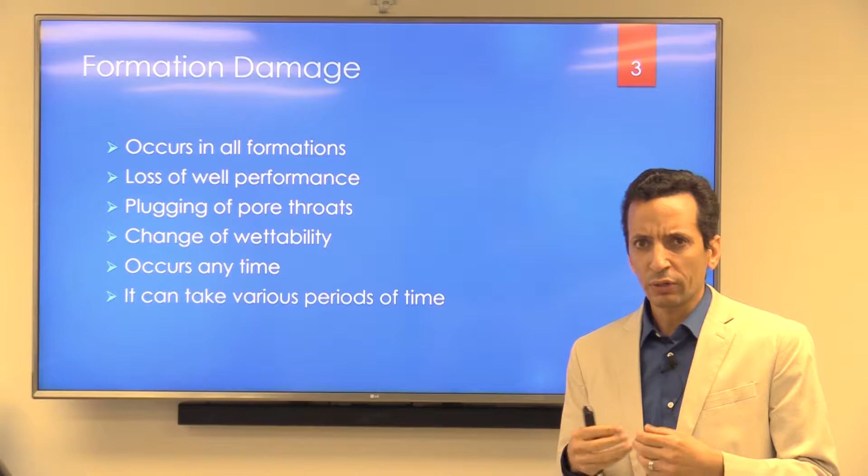Okay, let's begin. Imagine the situation. We have sick wells and we have healthy wells, very similar to human. If you feel something wrong with your body and you decide to go and see a doctor, will the doctor give you a medicine without asking you any question?

For sure, no. What will happen is the doctor will try to collect all information about what you're feeling, what is wrong with your body, he will check your body, and then decide what kind of disease you may have. And finally, he will write you the treatment, he will write you the medicine.

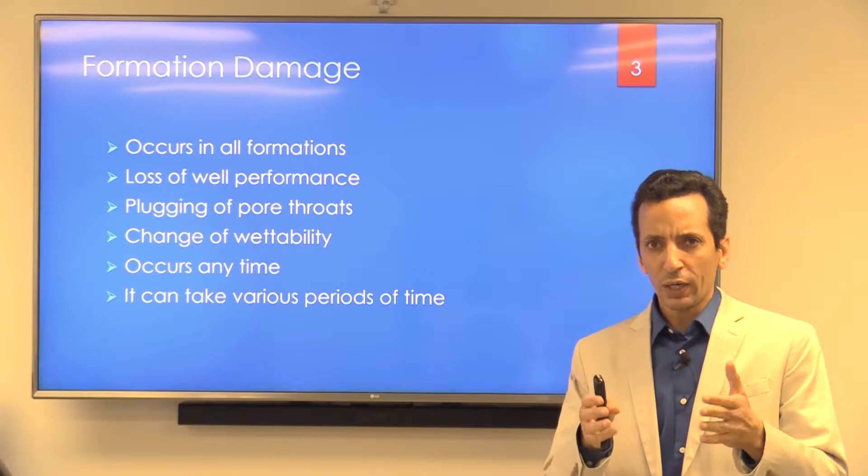Wells are very similar. If your job is a petroleum engineer or reservoir engineer, your job is similar to a doctor, and your well is your patient. The disease that your well has is the formation damage. So formation damage is very similar to a disease that makes you sick.

Formation damage may occur in all formations, may occur anytime, and we can easily identify there is a formation damage whenever we start seeing a loss of well performance, an unexpected loss of performance. This formation damage may change wettability, and for sure it will plug your pore throat.

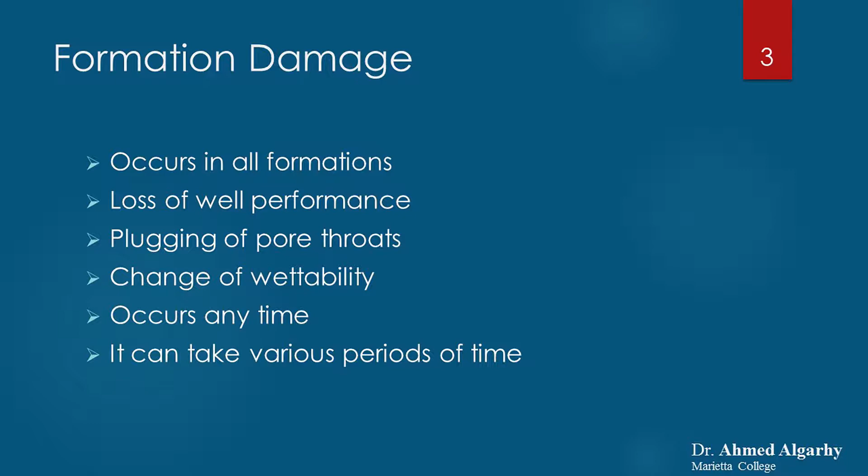It may occur anytime, as I mentioned before, it can take various periods of time. Also, similar to a disease of a human, it may be a single disease or maybe a combination of different diseases. So we need to figure out exactly what types of formation damage we have.

My advice to you, if you don't know the type of formation damage, please don't do anything. Take your time to study the case. And the last thing to do, whenever you feel that you understand the situation, you write your treatment. You decide if you will do an acidizing job or a fracking job or any chemical treatment you want.

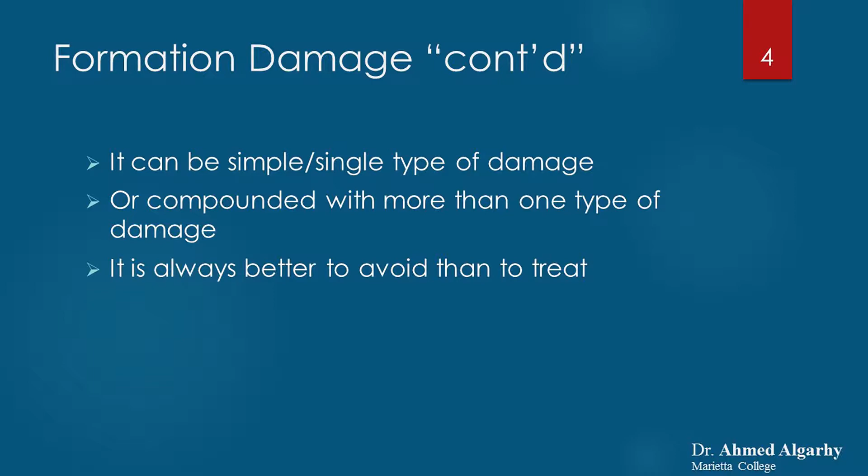Also, it is better to avoid formation damage, way better than letting your well get sick and then you start thinking of what should be the right treatment. And remember, the treatment of acidizing or fracking is hundreds of thousands of dollars, sometimes millions of dollars.

Okay, how to identify a formation damage? Simply, when I see that there is a loss in production, there is a loss in performance, also I can get a sample to the surface and do analysis for that sample and see there is a formation damage. Also, I can send a downhole camera, a video camera, and check if there is damage. This is not common, but it's still something doable. And finally, we can do a PLT, or production logging, to confirm that we have a formation damage.

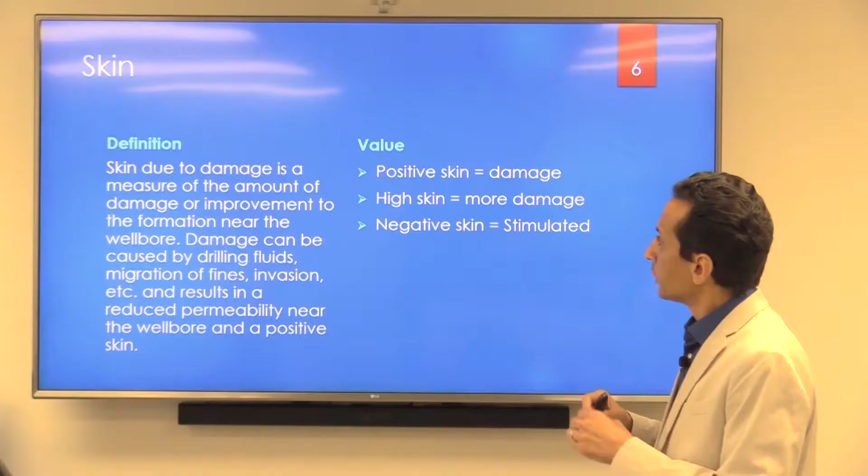Formation damage is something hard to quantify. So we invented the term skin to quantify formation damage. Whenever you see a positive skin, this means we have a formation damage.

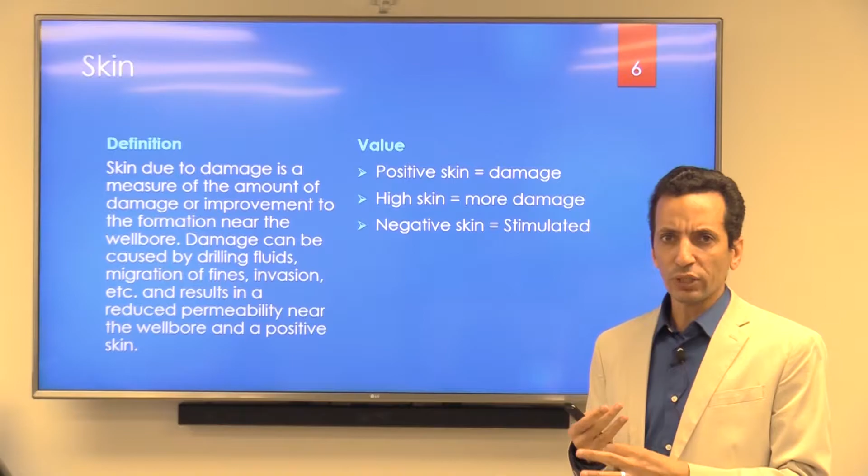If it is a high positive value, this means there is severe damage. If we see a negative value for skin, this means the well we have is stimulated. Stimulated means we did a frac job, acid fracking, acidizing, or any kind of treatment that may enhance the production.

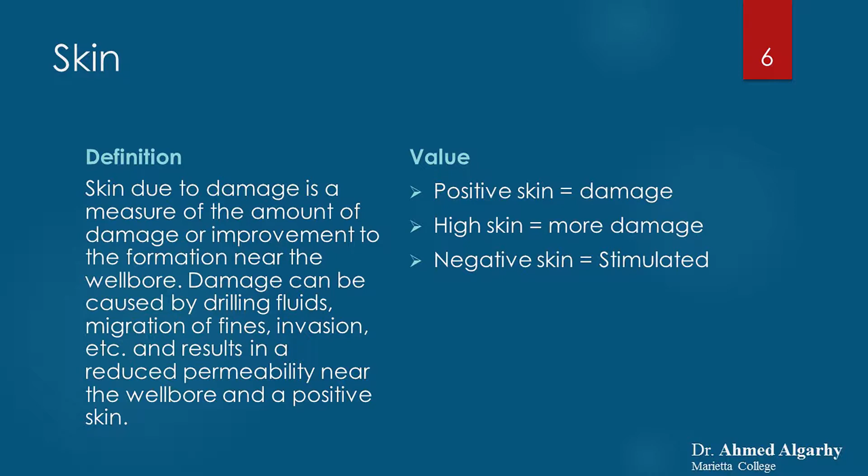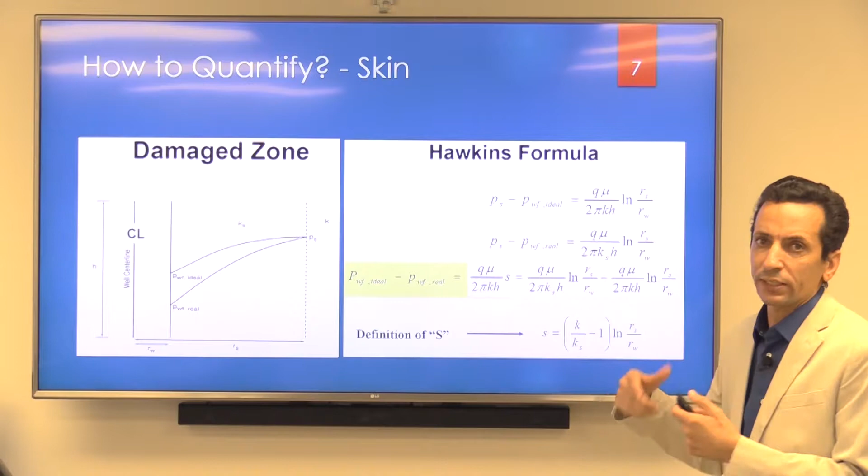So one of the models used to quantify skin is the Hawkins formula. As you see, S is the skin, which is K over Ks. K is the permeability, the reservoir permeability, the original permeability, over Ks, which is the damaged permeability, or the permeability inside the damaged zone.

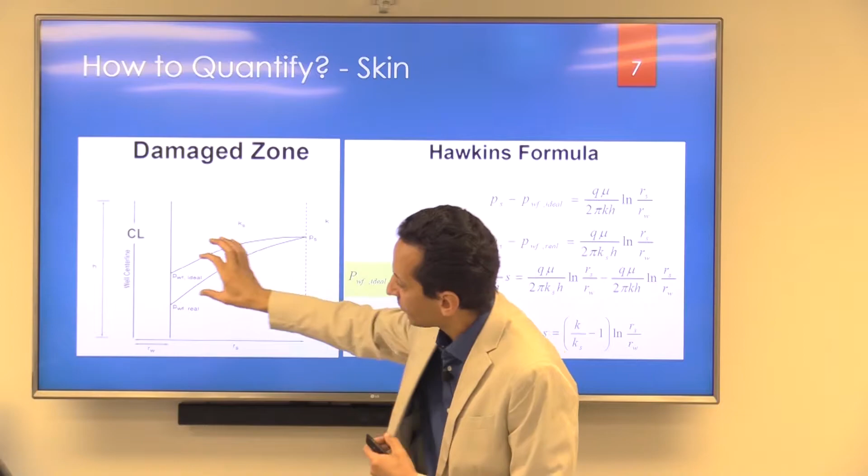As you see, starting from this line to the well bore, this is a damaged zone, from this line to this line. The ideal production should be this curve, but as you notice, because of the damage, we have a pressure drop. That delta P happened because we have a positive skin in this formation.

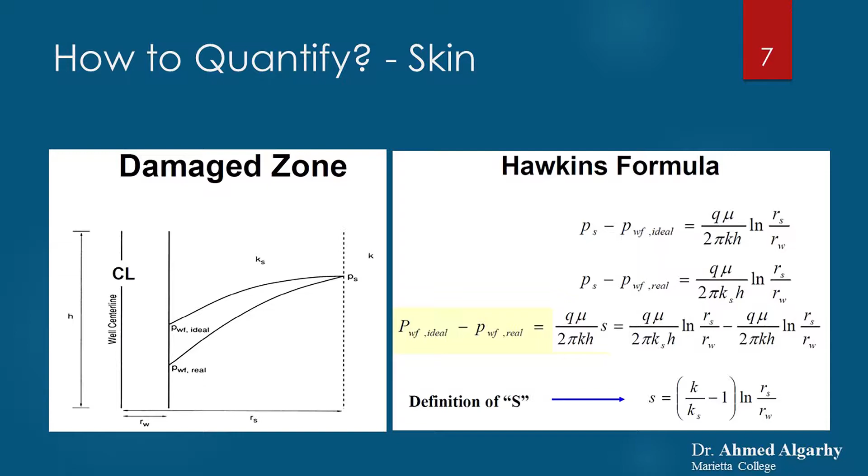There are different types of formation damage. The causes of formation damage may be mechanical or chemical. Mechanical causes may be like solids invasion.

Do you know when this happens? During the first day you drill your reservoir, because of the drilling fluids, the solids suspended in that fluid invade the formation and start damaging your reservoir permeability.

Also, it may be workover damage because of the workover fluid. And maybe it's emulsion, water and oil or oil and water, or maybe there's water blockage, and this is very common in gas wells.

Also, we may have some chemical types of formation damage, like precipitation due to incompatible fluids, and we get a precipitate of sulfate or sulfide.

Also, we may have fines migration. In the next slide, I will tell you exactly what fines migration is. One of the good questions I like to ask my students: what is the difference between sand production and fines migration? In the next slide, I will try to give you a good answer for this question.

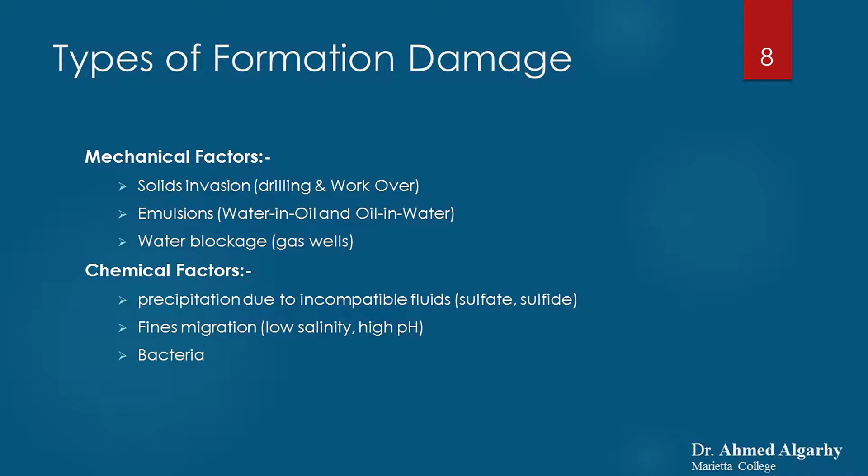And finally, we may have formation damage because of bacteria, very similar to, let's say, SRB or sulfate-reducing bacteria. It is a very common cause for formation damage.

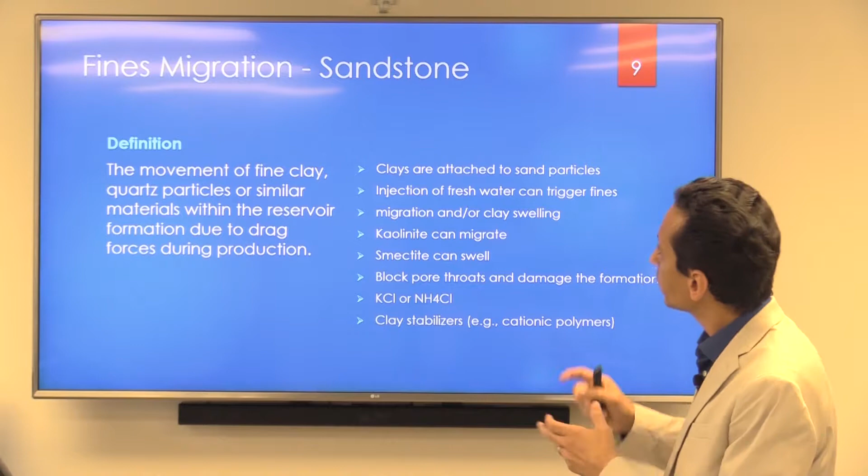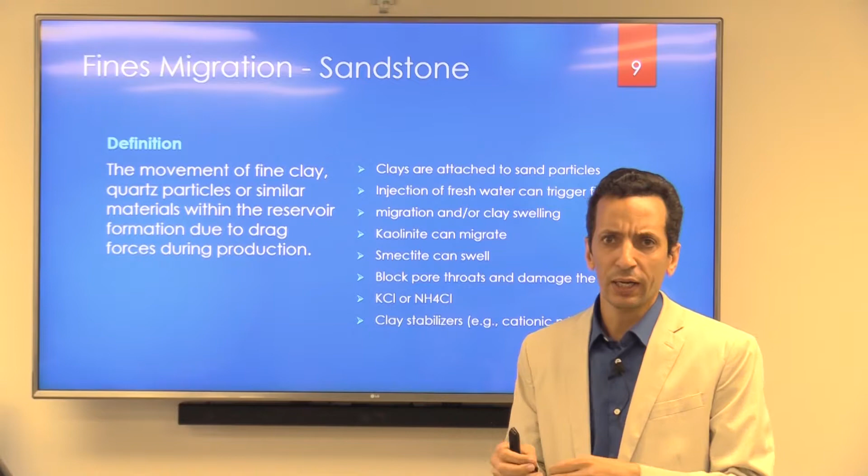What is fines migration? Again, fines migration is when you have solids inside your reservoir, most likely clays, most likely kaolinite, and these solids move from a location inside your reservoir to another location inside your reservoir.

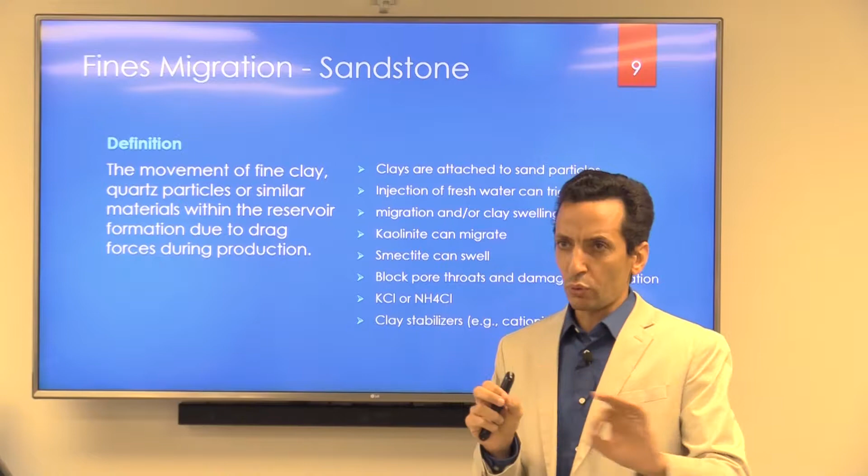But these solids are not produced, don't reach the wellbore and are not produced. So if that solids moves from a location inside your reservoir to a second location, it may get trapped or plug the pore throat and damage the permeability, but the solids are still inside your reservoir. We call that fines migration.

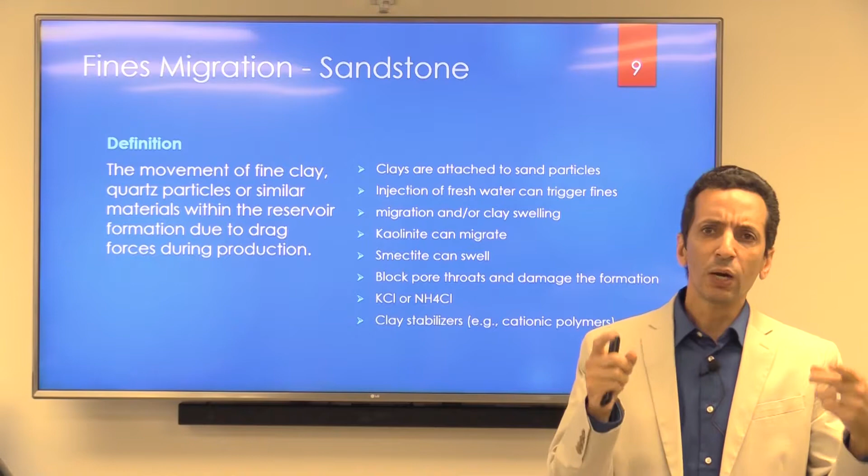A very common clay that does this behavior is kaolinite. And if these solids get produced to the wellbore, now we call it sand production. I wish this is now clear for you, the difference between fines migration and sand production.

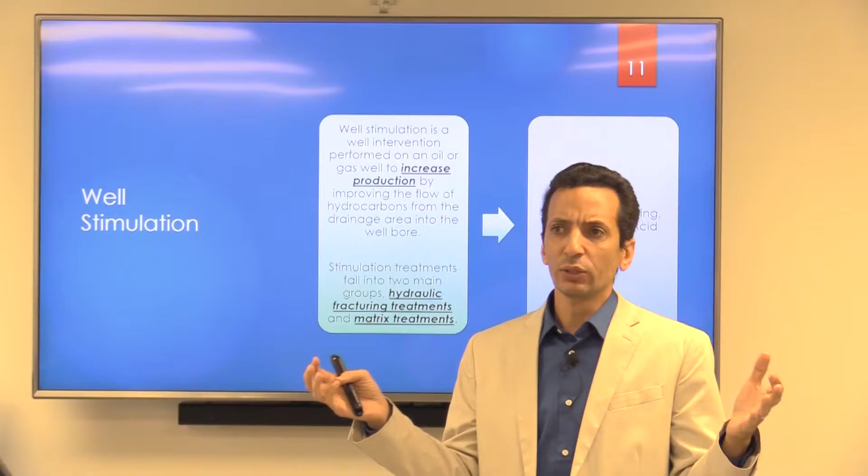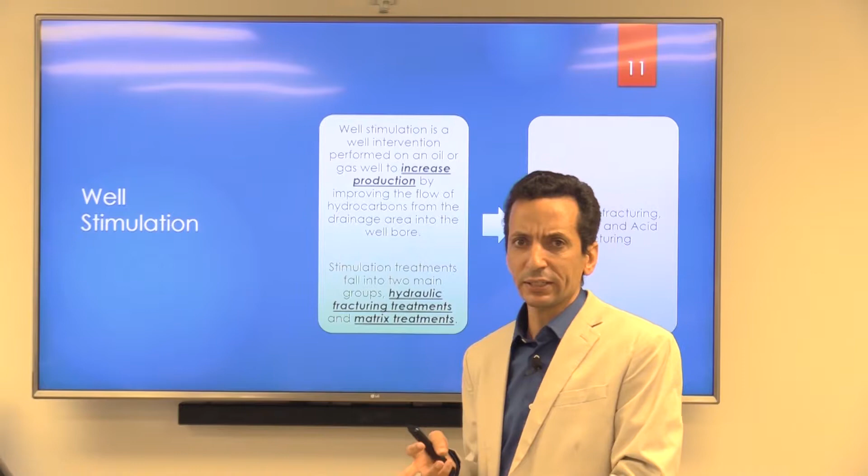Okay, now let's talk about what well stimulation is. By definition, stimulation is anything we do to stimulate the production or make the production better. So we may be talking about hydraulic fracking, acid fracturing, or acidizing. All of these techniques we call well stimulation.

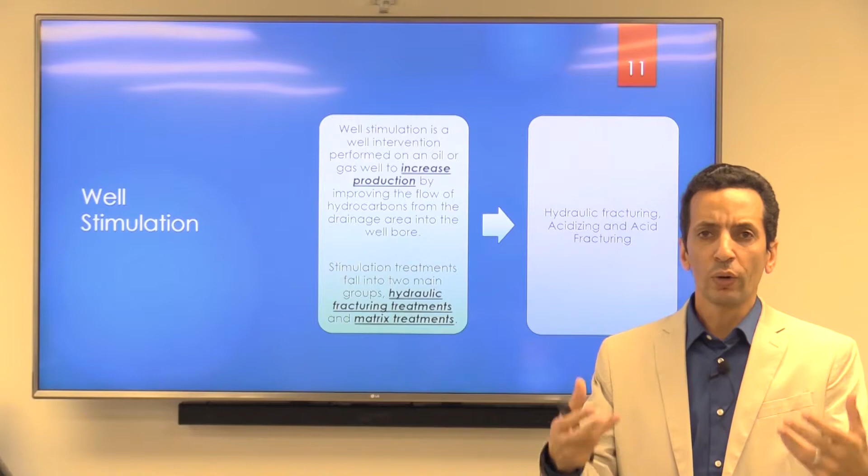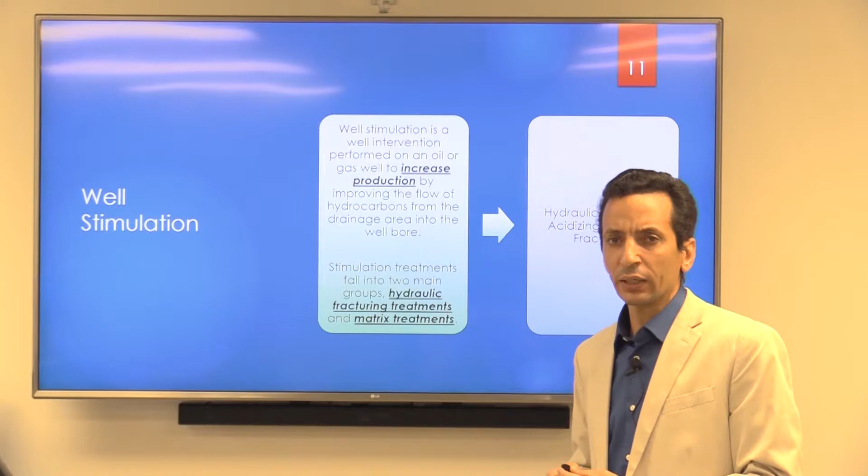Why? Because it stimulates my well production, makes my well production way better than normal. So a well stimulation job is a well intervention job that increases the productivity of my oil or gas wells. Again, it may be hydraulic fracking, acid fracking, or an acidizing job.

What is fracking? Simply, fracking is engineered fluid, or fluid with specifications, that we inject at high pressure and high rate into my reservoir to break it down, to crack my reservoir. When we crack the reservoir, we initiate, let's say, two wings.

Let's say this is the ideal case in a conventional reservoir. We initiate two vertical wings of a fracture, and these fractures keep growing away from the wellbore, and this increases the contact area with my reservoir and increases my productivity.

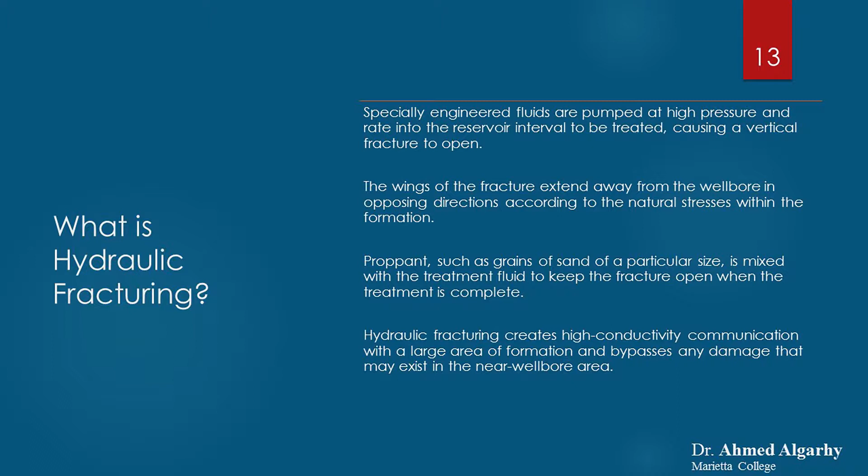But one of the problems I may have is that when you stop pumping, the fracture you created will close. This is why we need to use something to keep this fracture open.

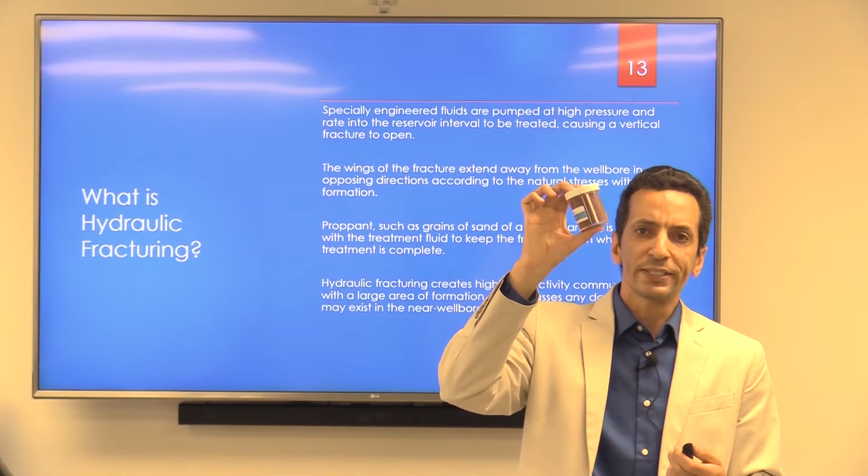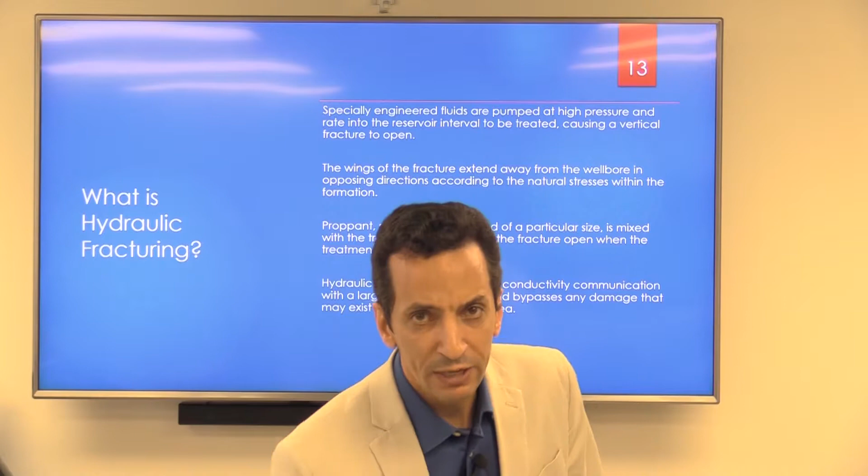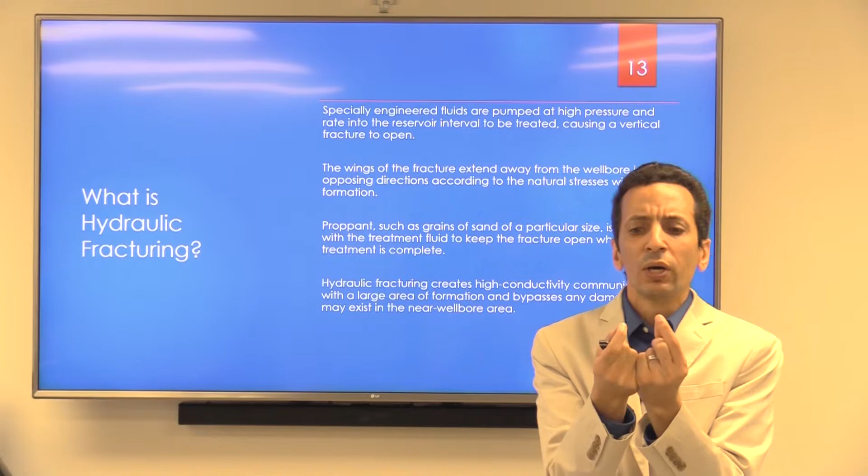And actually, we use something like this: a powder we call sand or proppant. We inject this with the frac fluid and it gets trapped inside the frac I'm creating. Whenever you stop pumping and the fracture tries to close because it's losing pressure, it will close on that proppant, and that proppant has very high permeability, so it will be similar to having a highway for hydrocarbon to reach my wellbore.

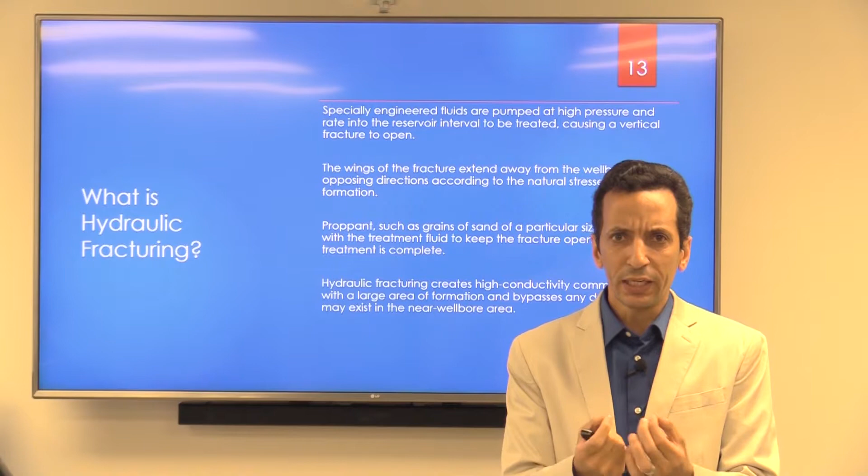So I'm still getting a benefit of increasing the contact area with my reservoir. And now, because of the proppant, I can keep my fracture open, and I can keep the good communication between my wellbore and my reservoir.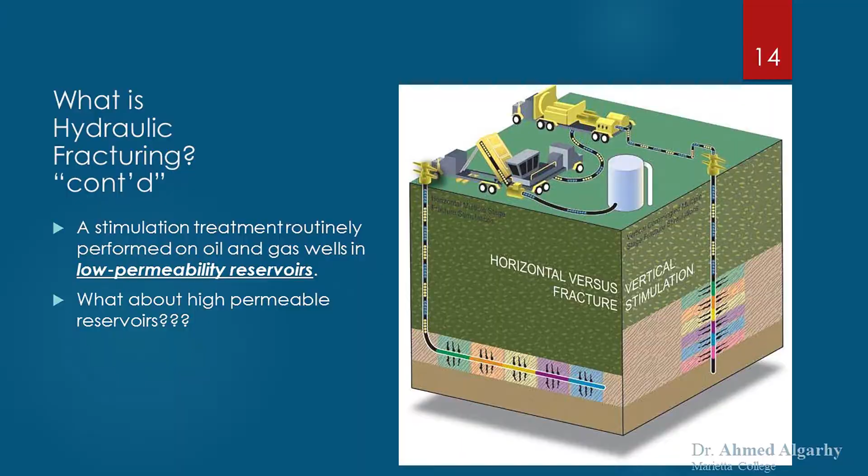Look at this figure. As you see here, this is a vertical well, and this is my reservoir, and I do perforations, and I keep injecting at high pressure and high rate until I exceed the resistance of that formation. I break it down.

When you break it down, you increase the contact area with the reservoir, and you start increasing production more than expected. And to keep the fracture open, we inject proppant with the frac fluid.

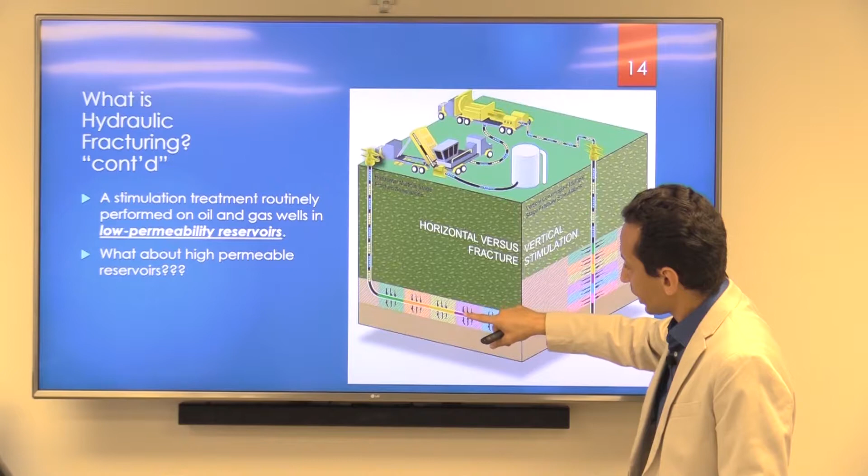Look at this horizontal well. This is the horizontal section, we call it the lateral. I cannot frac all that lateral in one stage, so I do it in stages. I perforate the first stage, then pump to create a fracture, then set a plug. Then I perforate again in the next stage, pump to create a second fracture, and set a plug, and so on. At the end, I drill out these plugs and open my well to production.

So why does a vertical well produce less than a horizontal well? Simply because the horizontal well has more contact area with my reservoir. Why does a fracked well produce better than an unfracked well? Simply because the fracked well has more contact area with my reservoir.

Another reason is that the fracture itself is similar to a highway, a very conductive surface I'm creating. This gives a very good path for the hydrocarbon to take immediately, in no time, from the reservoir. Whenever it reaches the body of the fracture, it gets immediately to the wellbore and gets produced.

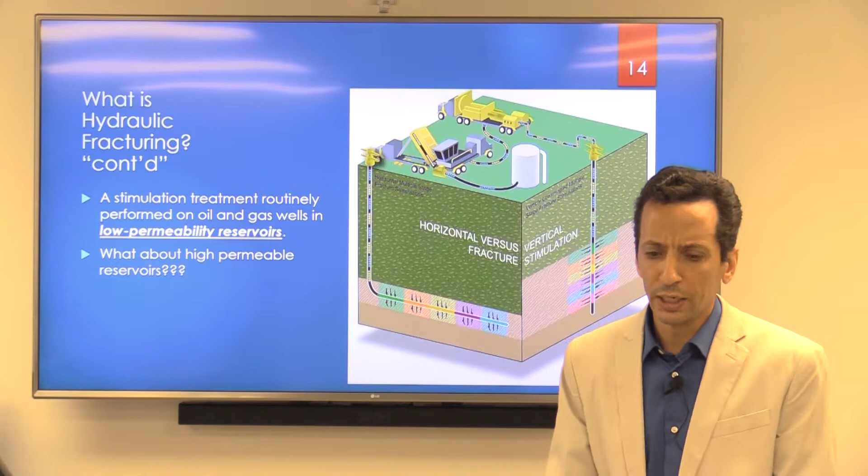To give you an idea of how a frac job looks, I want to show you this video. You have the link here. This is from Chesapeake, a famous company in the United States and one of the major gas producers. You can get this video from YouTube. Let's watch it together.

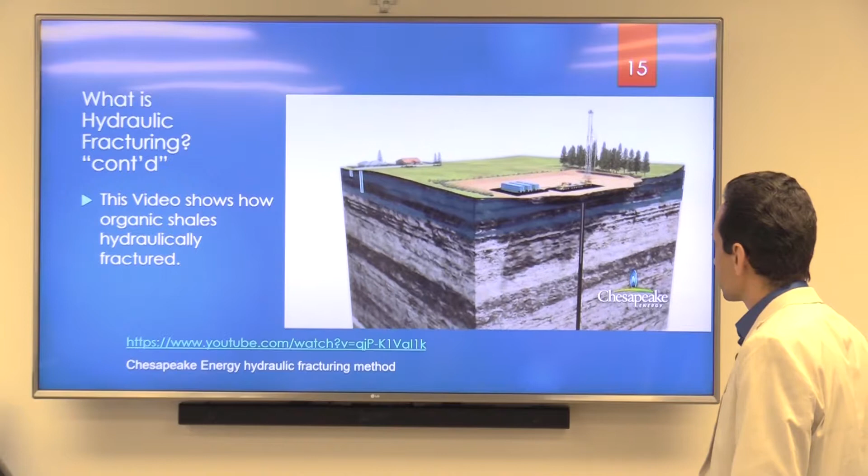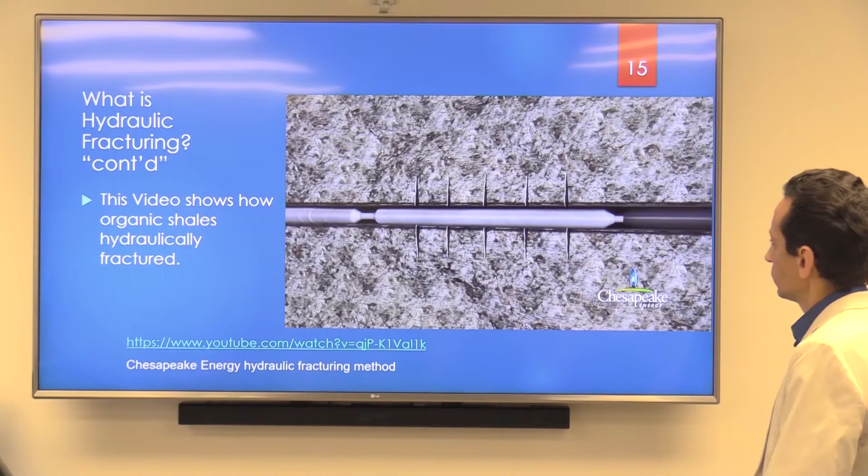In order to maximize the production potential of the well, the shale formation will be hydraulically fractured. In preparation for the fracturing process, the casing will be perforated in the horizontal portion of the well using tubing-conveyed perforating guns containing explosive charges. The perforated intervals are spaced approximately 50 to 80 feet apart and create a connection between the production casing and the shale formation.

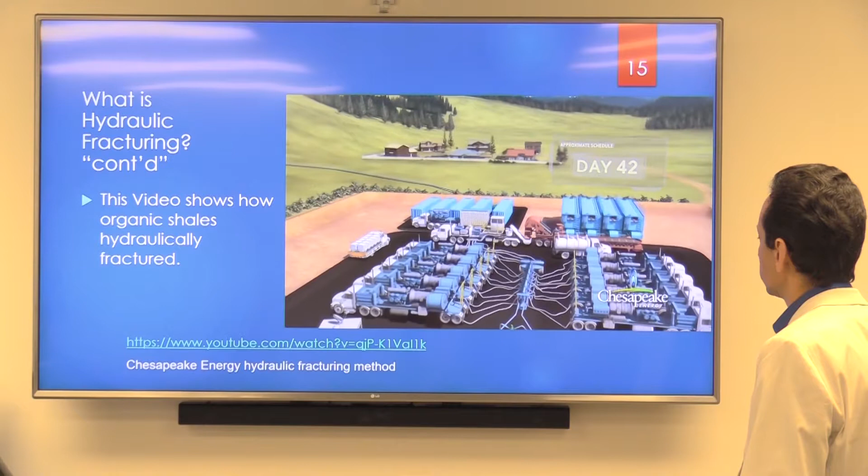With the initial perforating complete, the tubing and perforating guns are pulled to the surface, and the workover rig is replaced by a hydraulic fracturing crew consisting of high-pressure pumps and blending equipment. This equipment will pump a mixture of water and proppant, usually sand, through the newly created perforations in the production casing and into the shale formation.

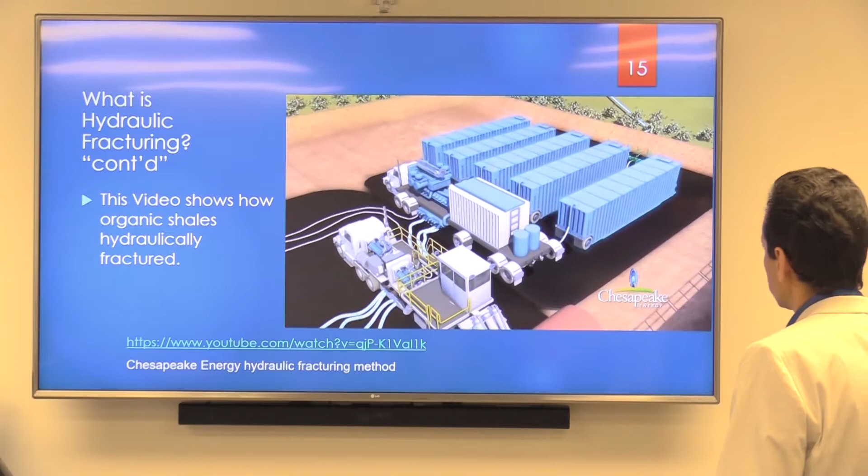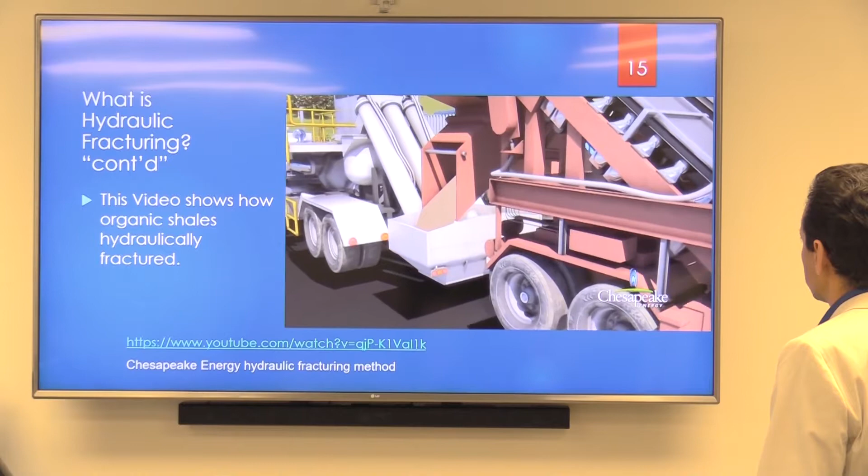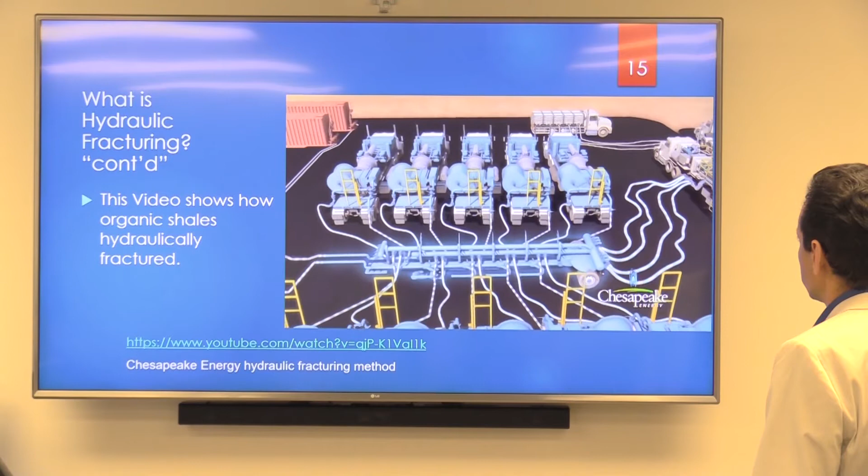First, water is passed from a water storage impoundment into the blue working tanks depicted on this location. The water is then pulled into a hydration unit, which provides the ability to gel the fluid before it is transferred to the blender. At the blender, proppant and a small amount of chemicals that aid in the fracturing process are added. The blender transfers the fluid and proppant mixture to the pump trucks through the low-pressure side of the manifold. The fracturing pumps increase the pressure of the fluid, sending it back through the high-pressure side of the manifold to the frac tree where it enters the well.

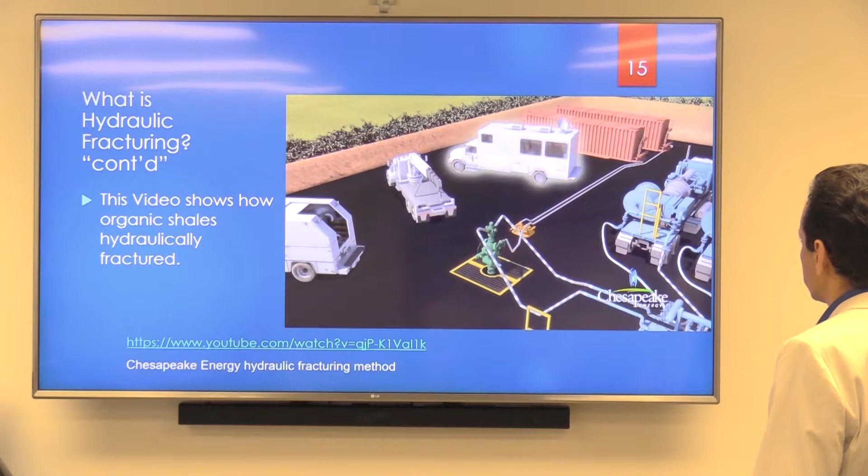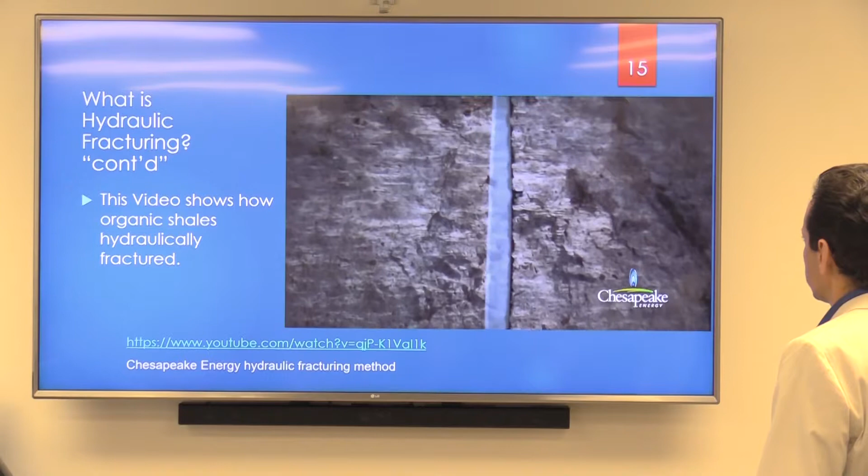The entire fracturing process is controlled from the treatment monitoring van. When the fracturing fluid reaches the perforations, pressure builds until the shale formation fractures, allowing fluid to enter the formation. Additional fractures are created along natural zones of weakness in the shale. These fractures are contained within the shale formation, well below the ground.

After an initial stage of fluid called the pad is pumped to create a fracture area, proppant is added to the fluid and distributed throughout the newly created fracture network. At the conclusion of the fracturing treatment, the proppant allows the fractures to remain open so that natural gas can flow into the production casing and to the surface. This completes the first of several stages in the fracturing process.

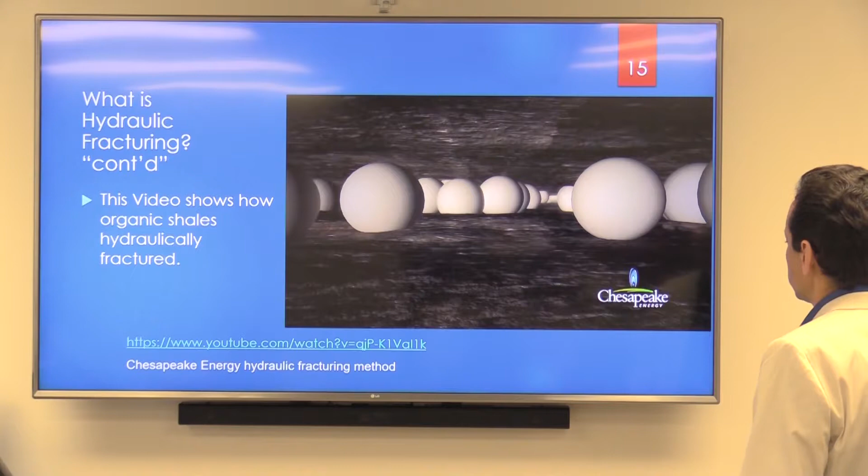This process is repeated by lowering and pumping down an isolation plug and perforating guns into the wellbore to complete the next stage of fracturing. This time, the tools are conveyed into the well by a wireline unit, which allows the fracturing process to proceed much faster and more efficiently. A lubricator is used to control the pressure of the well while the operation is taking place.

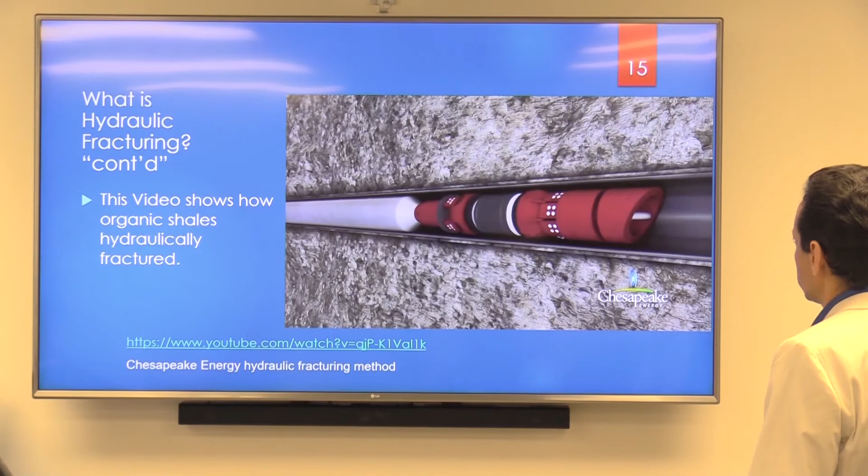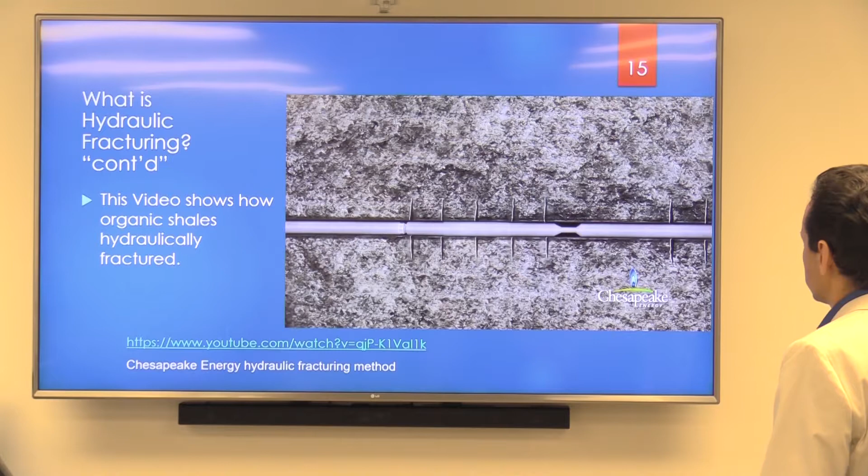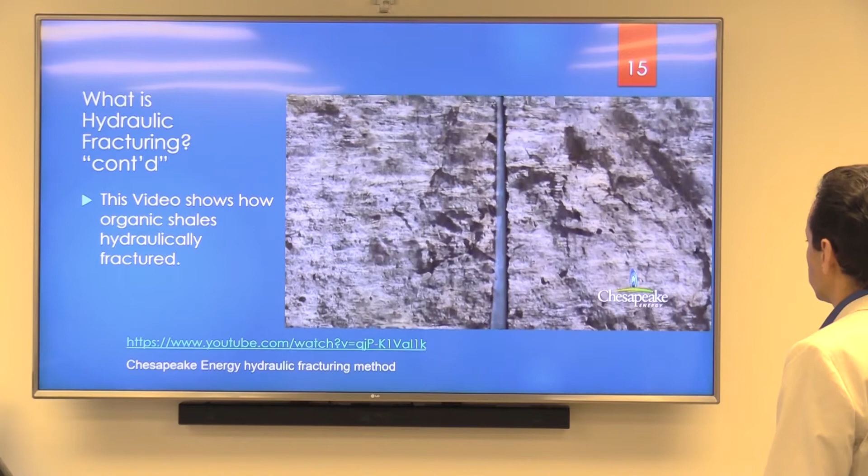On the bottom of the perforating gun, a composite bridge plug is placed to isolate the newly fractured zone. This ensures that the subsequent fracturing treatment is contained in the current zone. The perforating gun is again fired at roughly 50 to 80-foot intervals, creating a connection between the production casing and the shale formation. The fracturing process is then repeated until all stages are completed. A typical shale well has approximately 8 to 12 stages of fracturing.

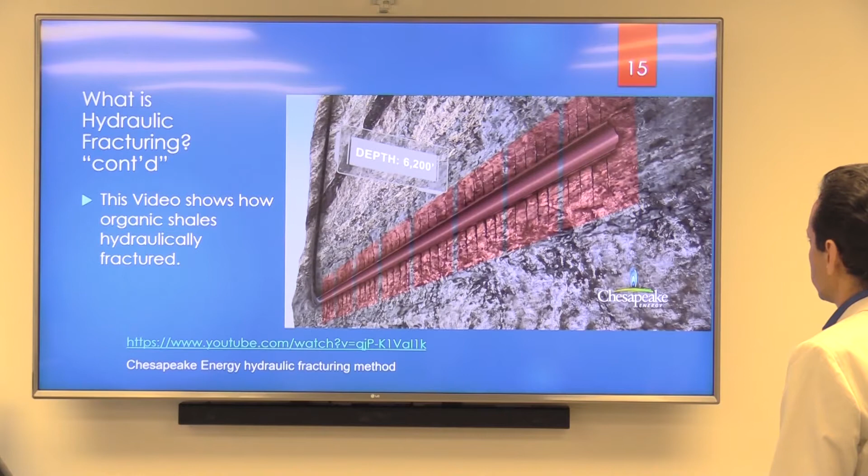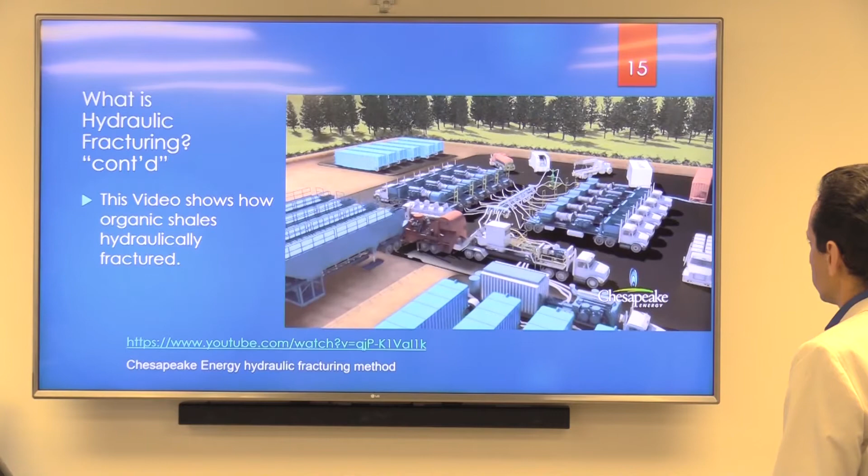At the conclusion of the fracturing operations, the isolation plugs are removed from the well and production can start. The produced fluids are diverted through a flowback manifold into storage tanks. The fluids are then recycled or disposed of according to state and federal regulations.

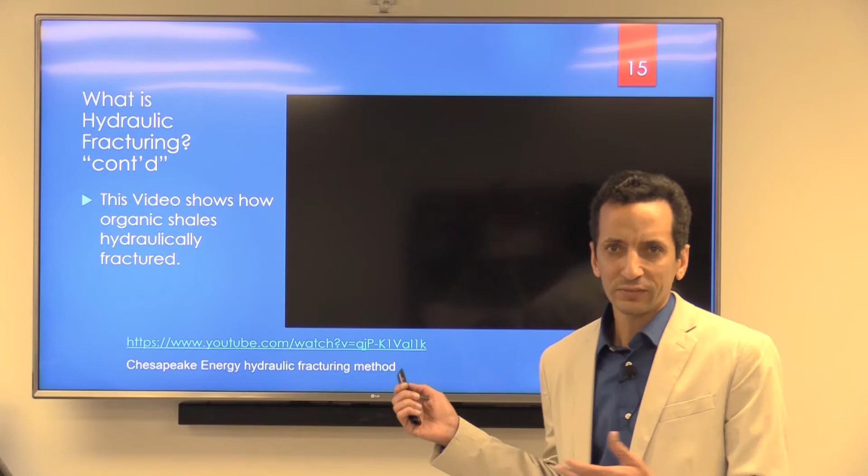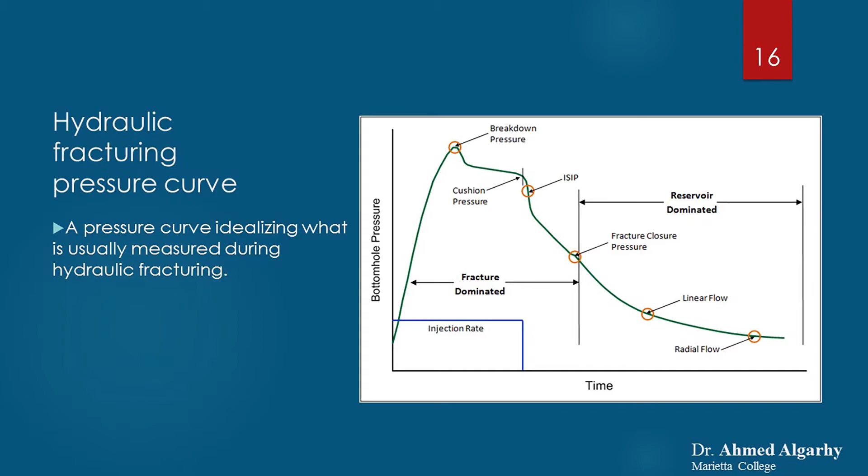Look, this is a pumping chart showing the hydraulic frac job. The x-axis shows the time, the y-axis shows the bottom hole pressure and the injection rate. Theoretically, we are trying to keep it at a constant rate. When you start pumping, the pressure starts rising as a straight line, then it bends to a point, then it goes down.

Now your formation is broken down. We call that the breakdown pressure, and the pressure will decline in a similar shape to this curve.

When you stop pumping, we call that the shut-in pressure. Somewhere very close to that, we call it ISIP, instantaneous shut-in pressure. In future lectures, I will explain how to get these values and what are the benefits of having them. Now the pressure keeps declining to a point.

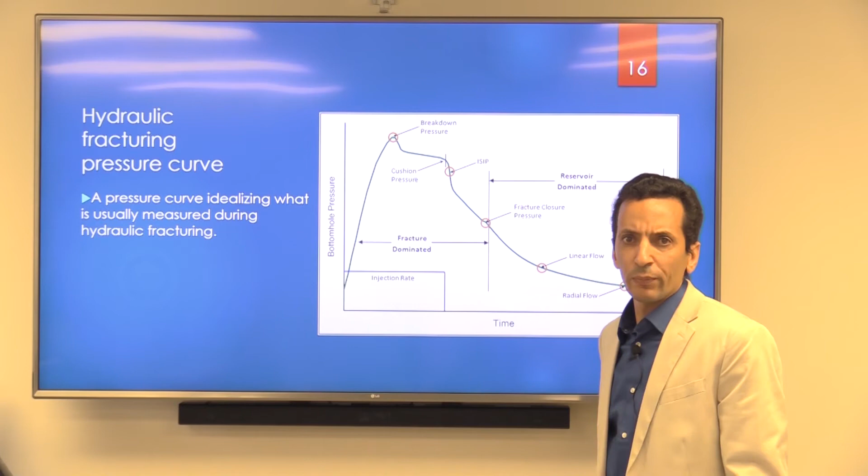Now our fracture is already closed. At that point, when we stop pumping, we call it the closure pressure point. So here we have the fracture closure pressure. At that zone, this is fracture dominated, or fracture dominant flow.

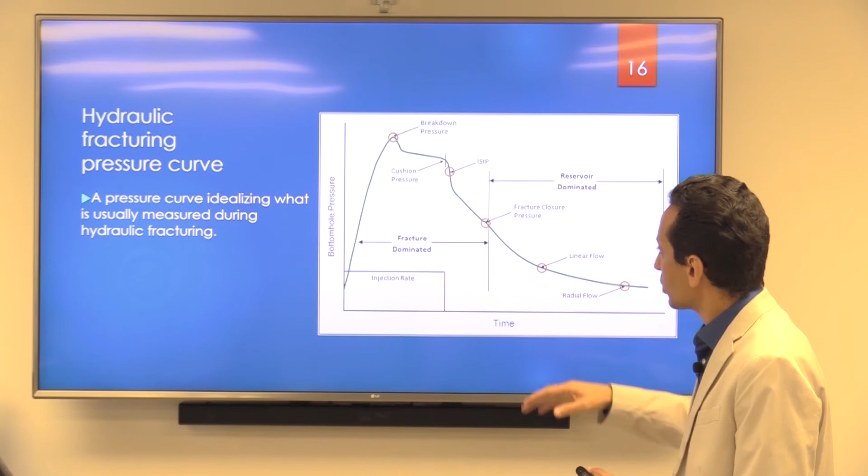Starting from this point, I'm sure the fracture has already closed on the proppant. So from this point to the end of the curve, all the flow regimes I have, we call reservoir dominated. Again, in future lectures I will explain in detail the value and benefits of the closure pressure and ISIP, and the benefits of analyzing this pressure curve.

As a summary, there is a wide range of applications of hydraulic fracturing. First, and most important, is to enhance production rate. Second, it can be used as a sand control technique. Remember, when we have a low permeability formation, we use fracking to increase productivity.

But one of the major problems we have with high permeability formations, like in the Gulf of Mexico, with a sand formation that is highly permeable, is that we start producing small particles of sand, solids, along with the oil and gas. This sand production is very harmful to my surface facilities and tubing. So we like to create short and fat fractures to work as screens inside the formation to stop that sand production. We call that technique frac and pack.

One of the applications of hydraulic fracturing is disposal: injecting produced water by hydraulic fracking, injecting drill cuttings by hydraulic fracking. I will give you a detailed lecture about this application.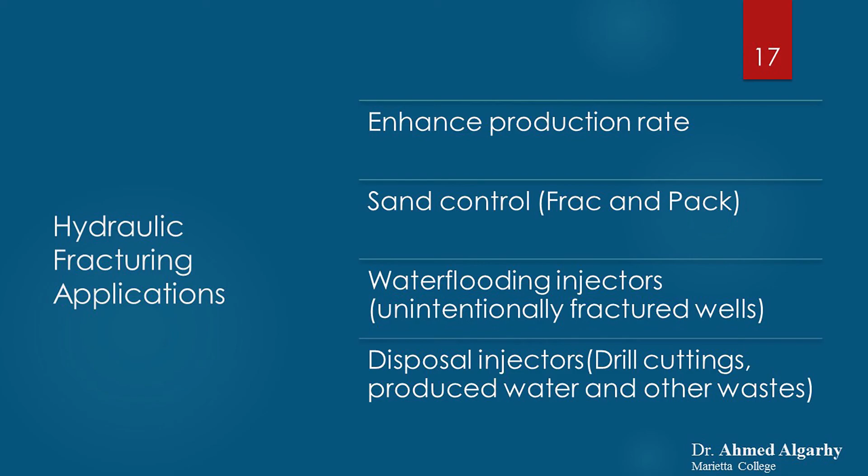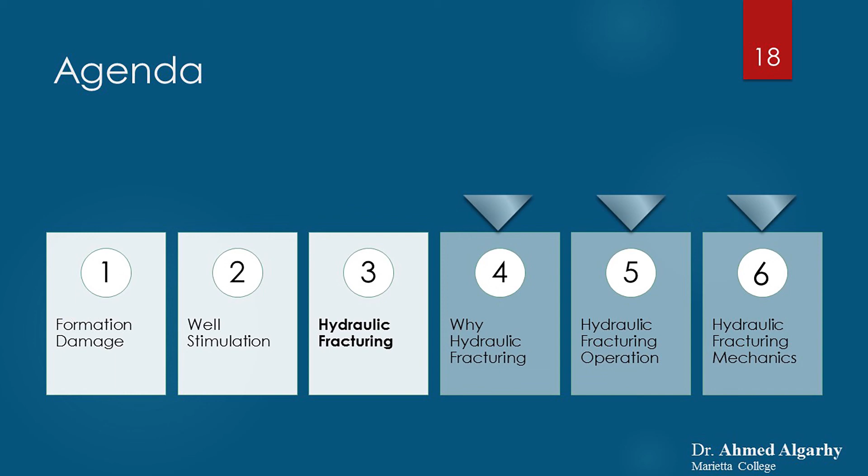So what is missing in this presentation to cover the last three items? Why we do hydraulic fracking, the basics of fracking operations, and finally the fracking mechanics. If you're still interested to learn about these three items, please wait for my second lecture.